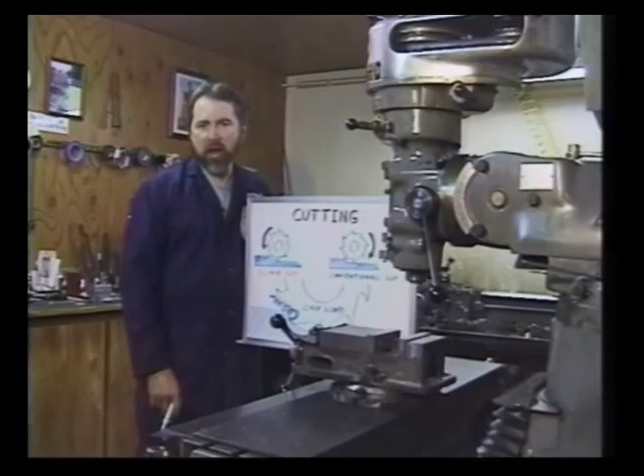It's time to take a look at cutting speeds, feeds, chip loads, etc. Also, we're going to be looking at the different types of milling cuts that we take: climb milling, conventional cutting. You heard me talk about those earlier.

More importantly, the types of feeds and speeds that we are going to show you in the formulas have all been prepared by the automotive industry, Society for Automotive Engineers, for high production capabilities, which will probably far exceed your expectations and what you may be able to achieve on a small vertical type milling machine like the Bridgeports and the Bridgeport knockoffs.

We'll show you the right formulas to determine the correct cutting speeds, feed rates, chip loads, etc. But bear in mind these are averages and examples for maximum production, and I strongly suggest that you back away from those a little bit.

We want to make our machine last. I believe in giving the machine a little bit of TLC while working it pretty hard so it earns its keep. But by no means do we want to wear a machine out in 2 or 3 years because we're trying to max it out every time we turn the switch on.

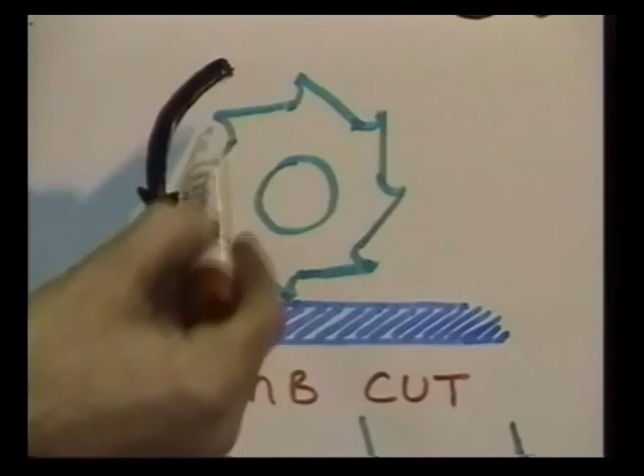Alright, let's take a few minutes and go over the different types of milling cuts and how they're performed. You can see here we're talking about climb milling. The rotation of the cutter is counterclockwise, and we are feeding the material in this direction into the cutter.

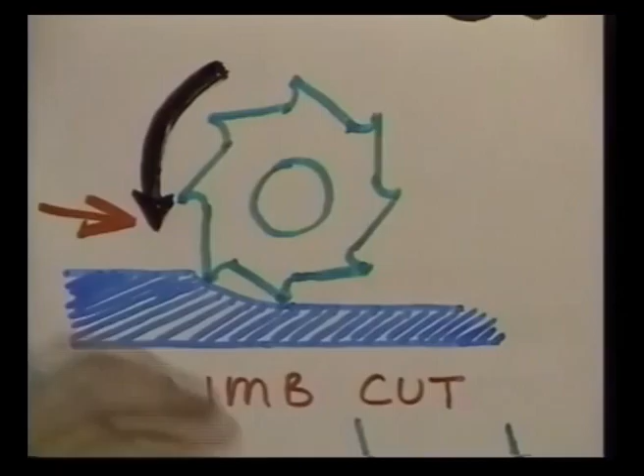So as these cutting teeth come around, in essence they're climbing, walking over the top of the material. This is done more in a horizontal mode. You can do it on the vertical mill as well, and this should be done only for finish cuts.

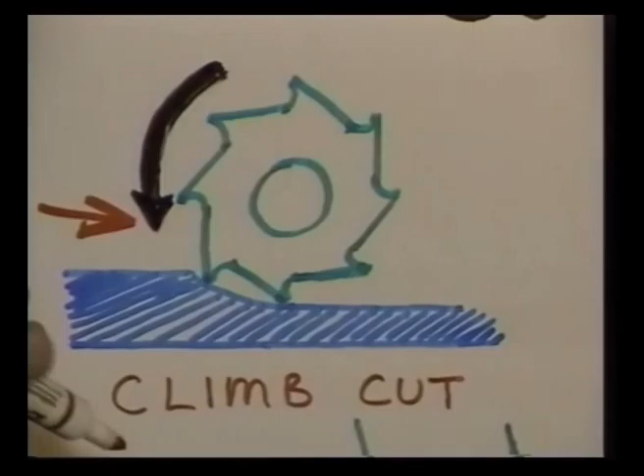If we were to take a real heavy cut in this fashion without having some type of restriction on the table feed, either manual or power feed, this cutter would want to keep advancing and sucking that material into itself, pulling the material from the jaw, from the work hold down on the table.

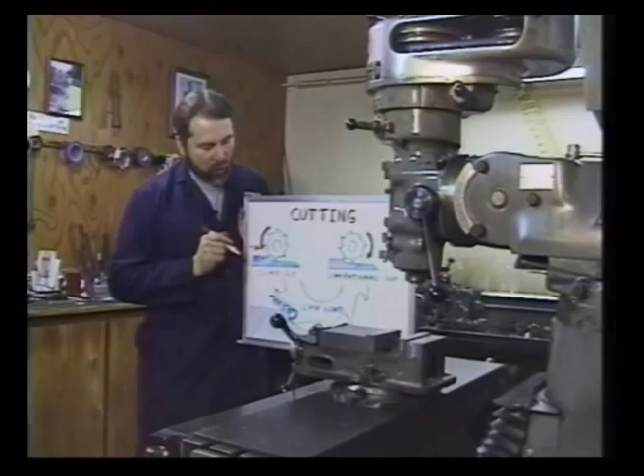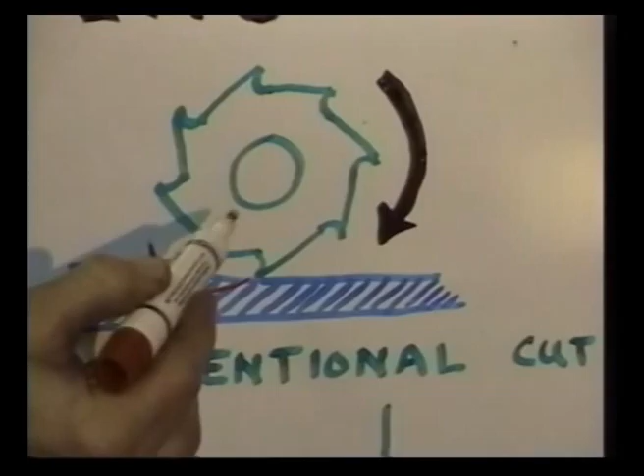A more appropriate cut for most of our roughing cuts is a conventional cut. The cutter is rotating clockwise, and we're digging out as we work around this cutter each and every time, scooping that work material out as we go. The machine itself is resisting the advancement of the cutter.

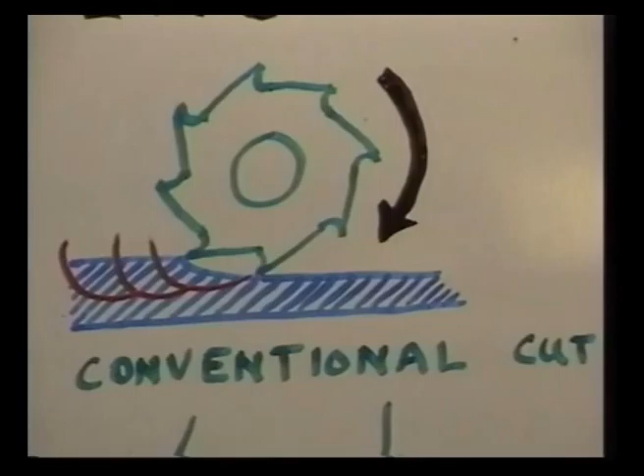We can do a lot of roughing this way, and then we'll come back with a climb cut and take 10 or 15 thousandths, working our way over the top, producing a very smooth, uniform finish on the parts.

Now let's go to the bottom of our diagram and take a look at the chip load. This will give you a better understanding of what's actually occurring. Each flute or tooth on the cutter comes around, scalloping up that work material as it's removing material from the base plate we're milling here.

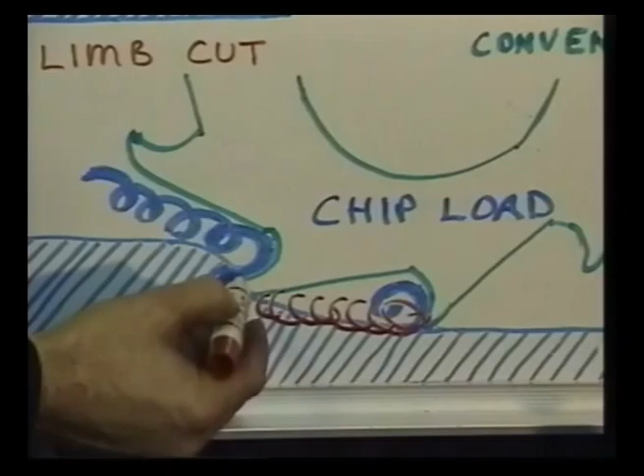We want to maximize the revolutions per minute, the depth of cut, and the feed rate we achieve, to pull off the maximum amount of material without abusing our machine.

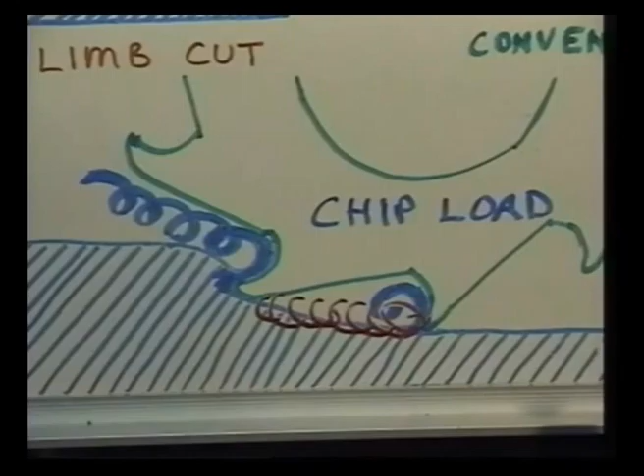As we look at this cutter, can anyone tell me what type of milling we're doing? Is it climb milling or conventional milling? For those of you that said conventional milling, you're catching up to speed. The cutter is coming along, scooping out this material as it works its way along.

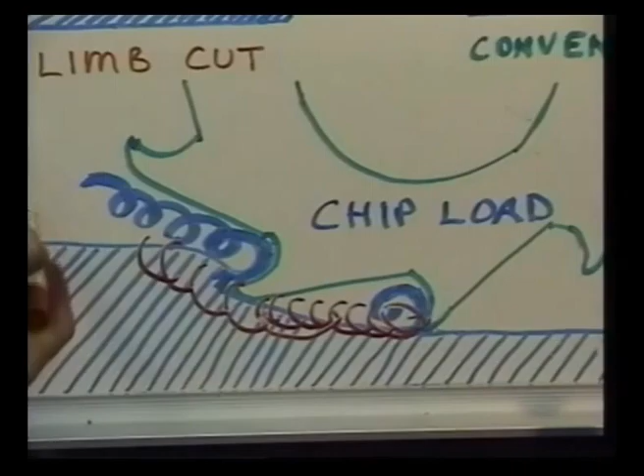If we were climb cutting, the cutter would be going in a counterclockwise position, walking over the top of the part. Alright, we only use that in a finish cut application. That pretty well covers the two types of milling cuts: conventional milling and climb milling.

If we've lost you somewhere along the way, by all means reach over and hit rewind, review this section until you have a good understanding of these types of milling operations. Now let's take a look at spindle speeds.

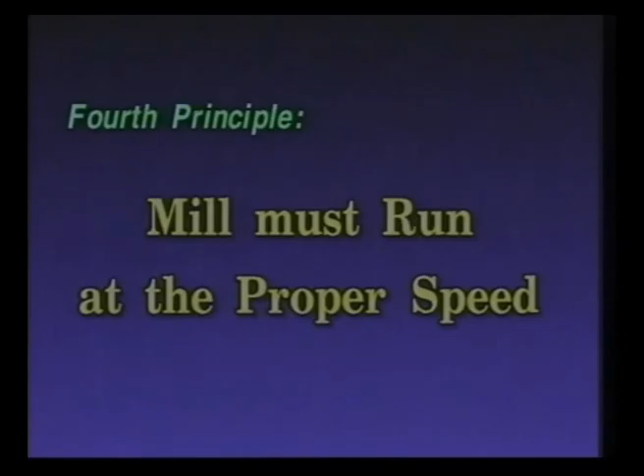For some of you, determining the proper spindle speeds may be a little confusing. It's actually very simple, but in order to determine the correct spindle speeds, we need to understand more about surface feet per minute, which is the amount that cutter rotates in a complete revolution.

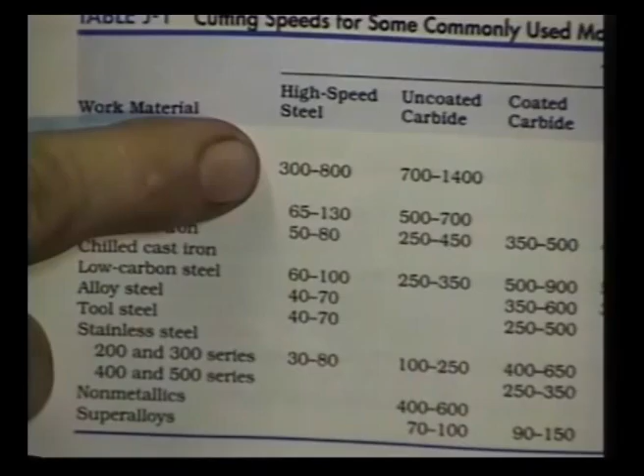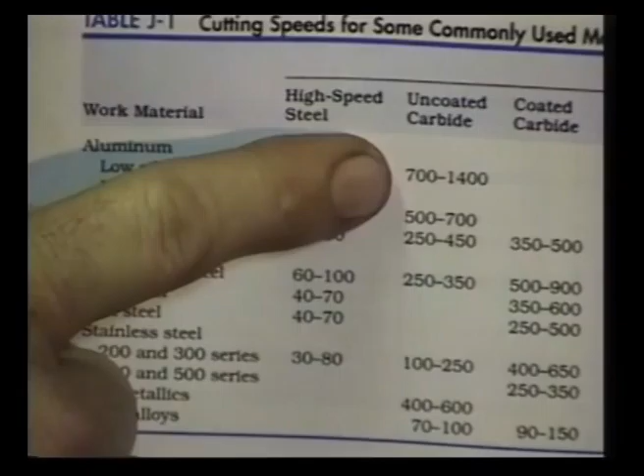Let's take a look at a chart showing some of the different surface feed rates for different types of materials we're likely to encounter in our machining course. Aluminum, using a high-speed steel end mill, would have a surface feet per minute rate of 3 to 800, so we'd choose something in the middle, say 5 to 600. If machining with uncoated carbide, that speed goes up considerably to 7 to 1400. I would choose middle of the road, say 1000.

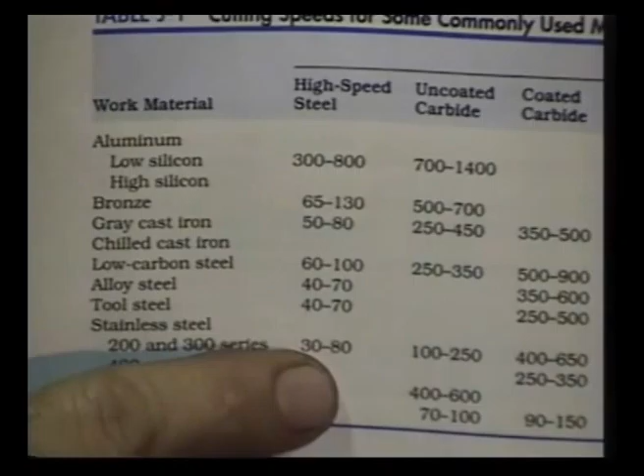Now let's look at some different materials. Low carbon steel with a high speed end mill: 60 to 100. Uncoated carbide: 250 to 350. Stainless steel, 2 and 300 series: we'd be looking at 30 to 80 with a high speed end mill, and 100 to 250 with an uncoated carbide.

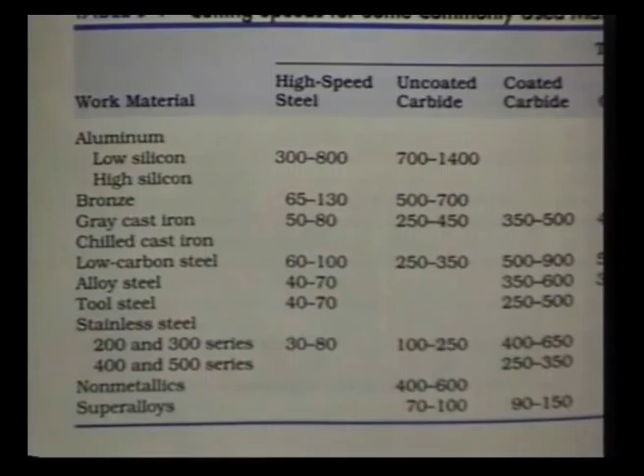These are the different standards we'll use when calculating the correct RPM for the type of material and cutter being used. Remember, when trying to determine the correct RPM of our cutter, these numbers are in surface feet per minute. It's very important to remember this when we calculate RPMs. Copies of this chart and others are available in your Machinery's Handbook. Remember, these are averages we want to use to determine the correct cutting speed. Variables will include types of material and heat treat of those specific materials.

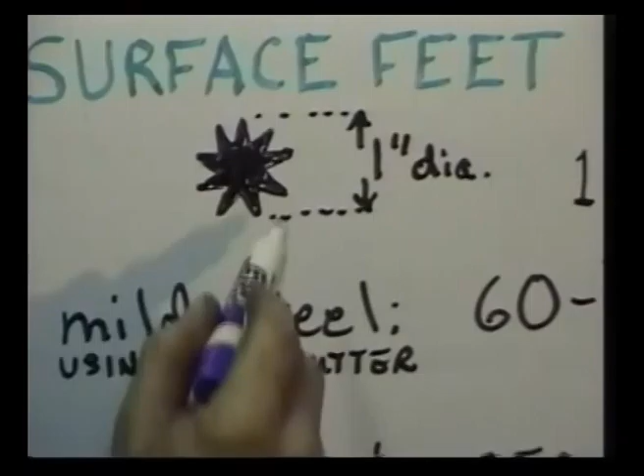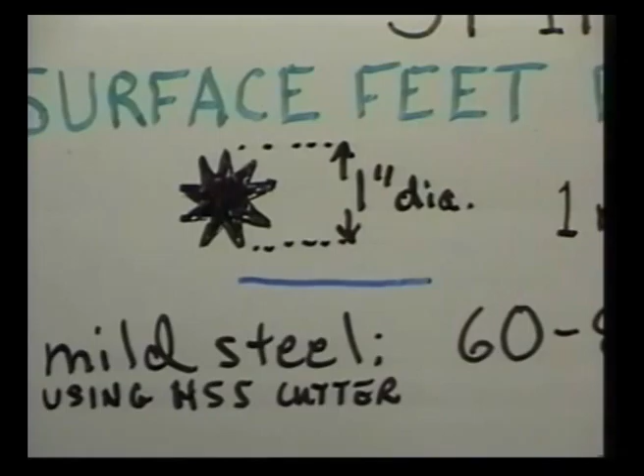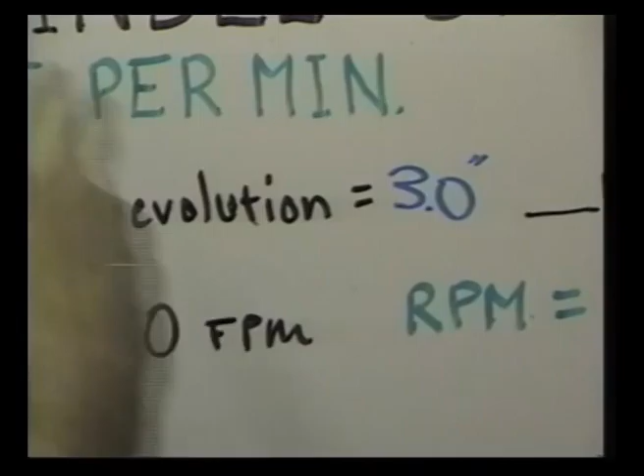Now let's look at some practical applications and determine the proper spindle speeds for different materials. We have a 1-inch diameter cutter, and if we visualize unraveling that cutter at a starting point and rotating it one complete revolution, or multiplying it by pi, that cutter in surface feet is going to lay out 3 inches. So one revolution of the cutter is equivalent to 3 inches if we were to unroll it based on its diameter.

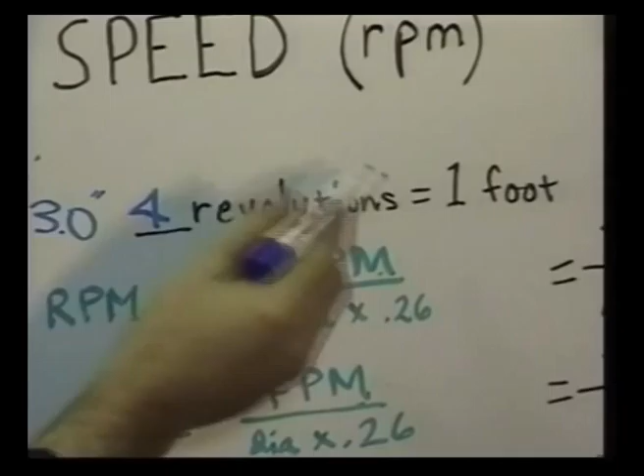Now, the number of revolutions to make a foot: we would have 4 revolutions equals 1 foot. It's important to understand that this figure isn't one we're going to work with directly. It helps us understand that 4 revolutions equals 1 surface foot of rotation of a 1-inch diameter cutter.

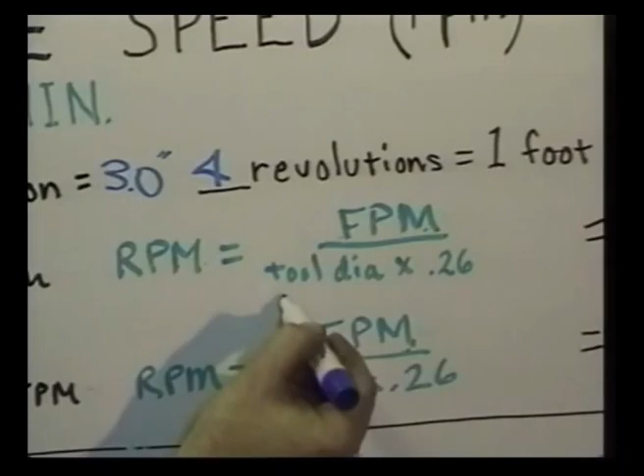Now let's take a look at the formula: RPM equals feet per minute divided by the tool diameter times 0.26. This is the basic formula we're going to be working with. Now let's apply that formula.

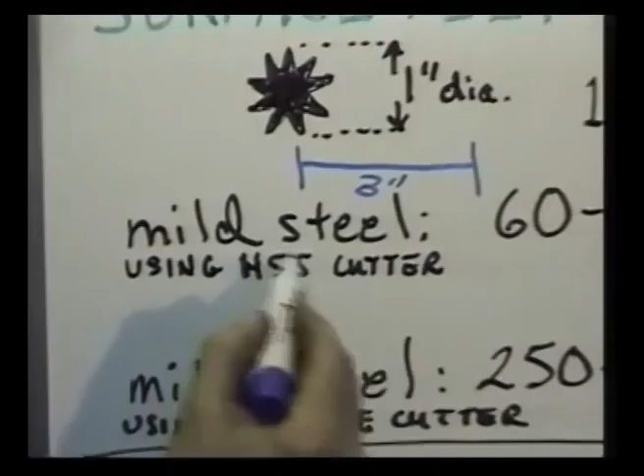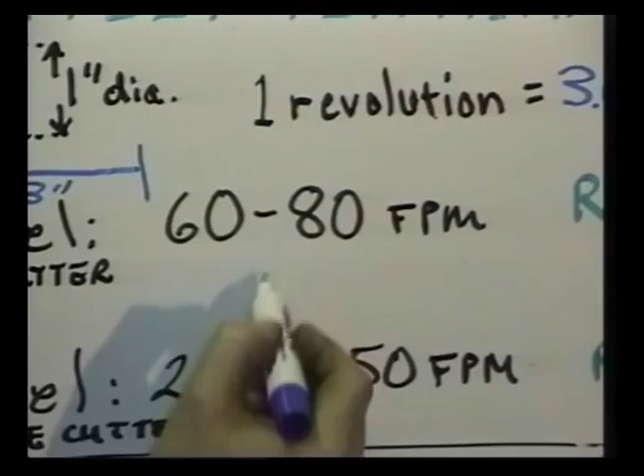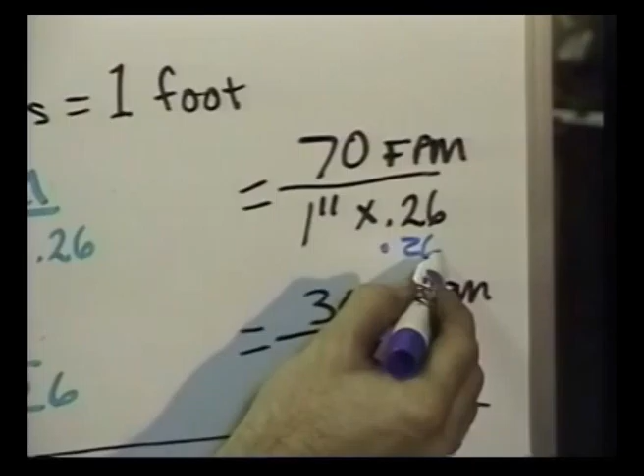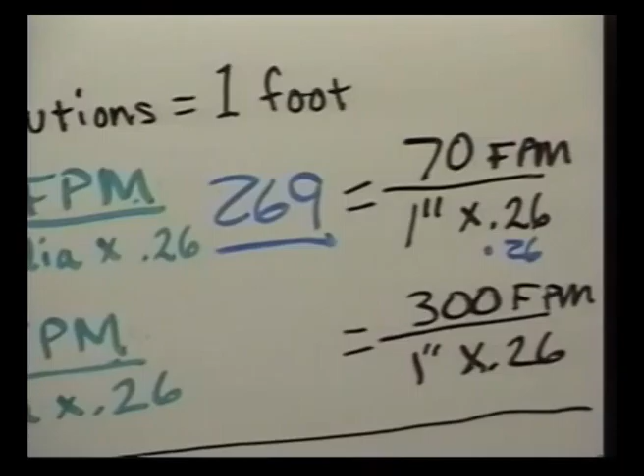We're going to be machining mild steel using a high-speed cutter. The cutting speed is 60 to 80 surface feet per minute, so let's average that out and use 70 as our factor. We've got 70 feet per minute using a 1-inch diameter cutter times 0.26. Multiplying those gives us 0.26. We divide 0.26 into 70, and that gives us 269, which is the RPM we'll use for a 1-inch cutter machining mild steel.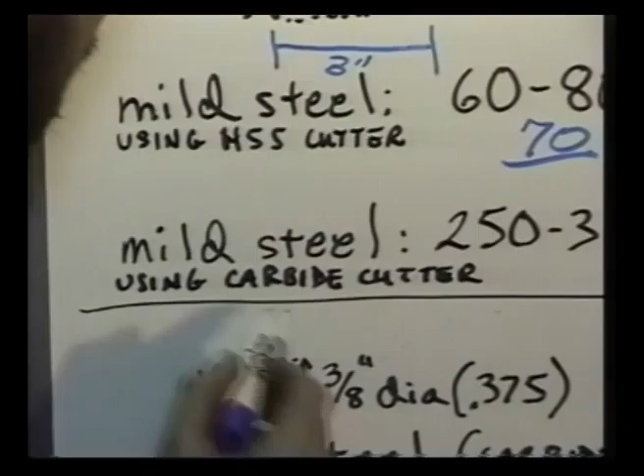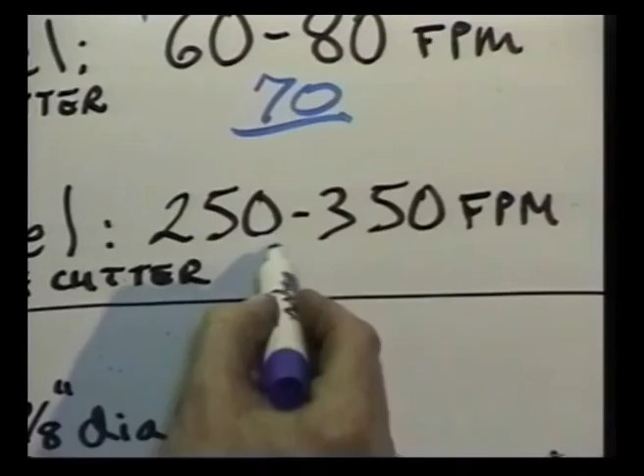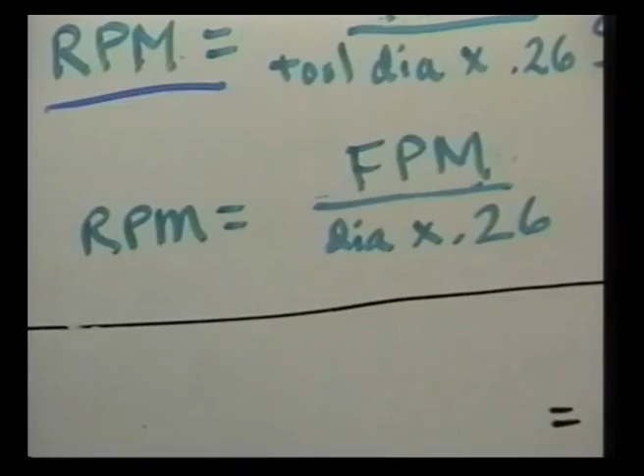Now let's use another example: machining mild steel with a carbide cutter. If we refer to our chart, the suggested surface feet per minute is 250 to 350, so let's average that at 300 feet per minute. To determine our RPM, we have 300 feet per minute, using the same 1-inch diameter cutter times 0.26, and we divide that into 300. That equals 1,153.

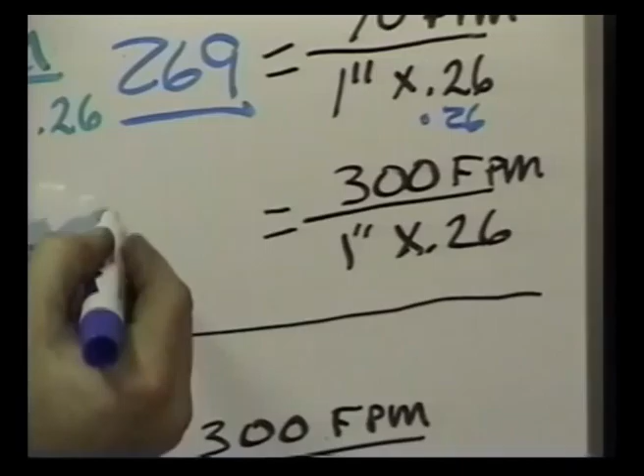So we would simply look on our milling machine and try to find the proper speed as close to that as possible. If we have a speed selection of 1,100 RPM, that's more than adequate for the task at hand. If we have one at 1,200 or 1,250, that should also be pretty decent depending on the type of alloy or material we're machining. Remember, this is a guide—practical application and listening to the machine are also to be taken into consideration when determining the correct RPM.

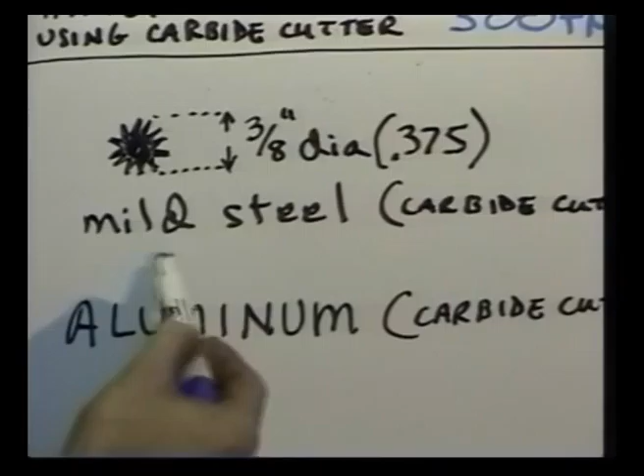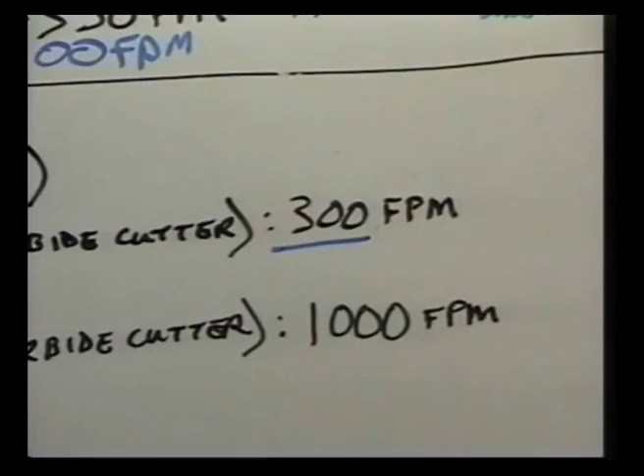Now let's take it a step further with a different diameter cutter: a 3/8 diameter cutter, decimal equivalent 0.375. We're going to machine that same mild steel using a carbide cutter. Referring to our chart again, we average the feet per minute at 300. So we have 300 feet per minute divided by 0.375 times 0.26. 0.375 times 0.26 equals 0.097, so we divide 0.097 into 300.

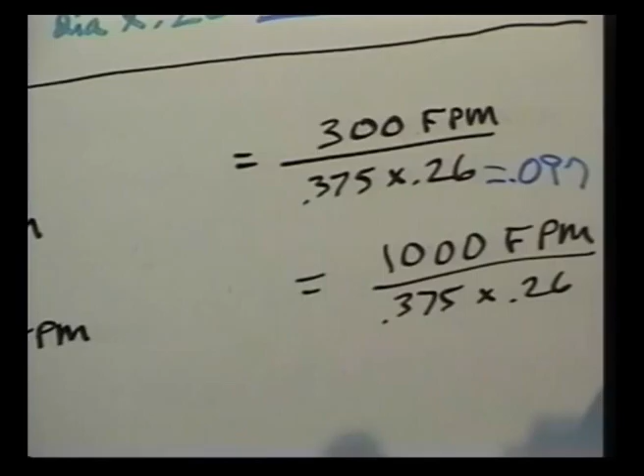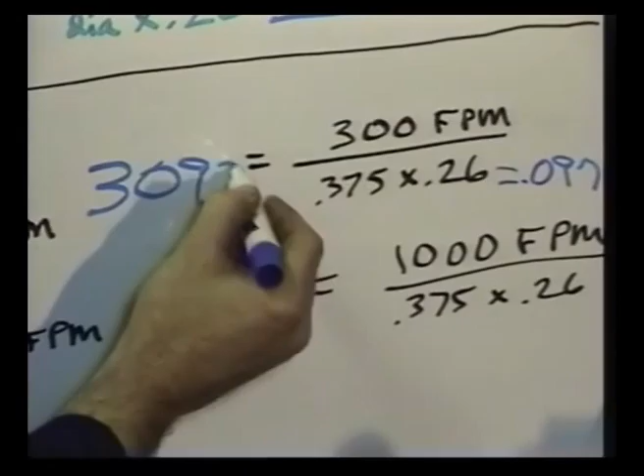And that gives us an RPM rate of 3,092. So again, we would look up on the mill whether we're using a variable speed machine or a step pulley system. It's important to note that a variable speed machine usually has a higher RPM rate than a step pulley system. Does that mean the step pulley system won't work for us? By no means. They've been using step pulley systems long before anybody dreamed up the idea of a variable speed motor. So we would simply choose an RPM rate close to our 3,092 as suggested by our formula.

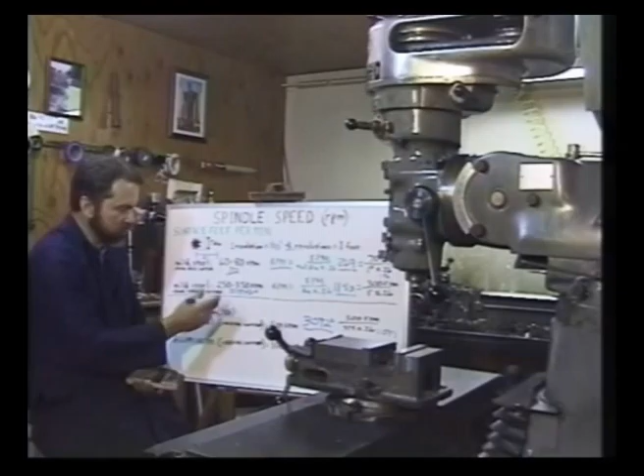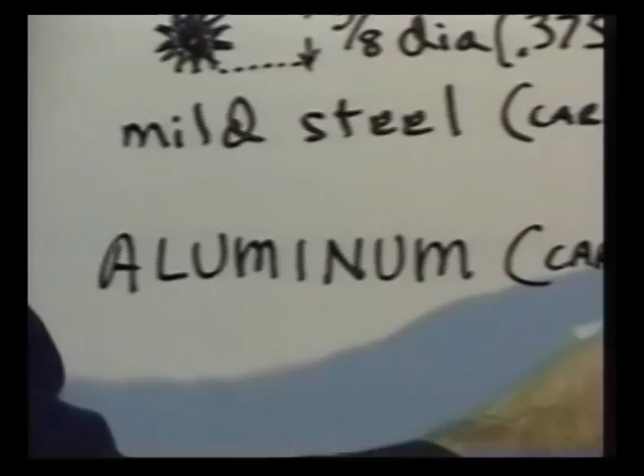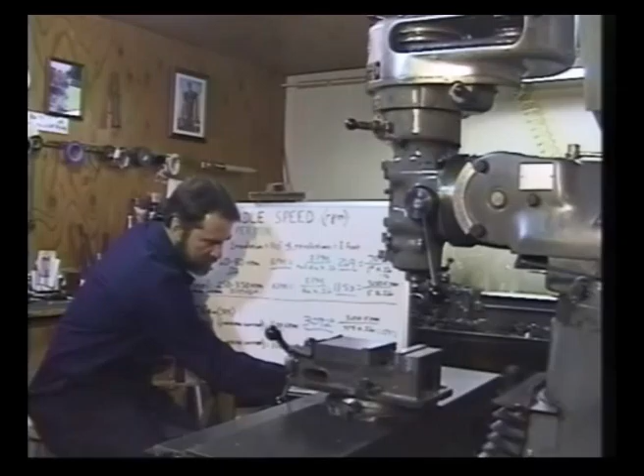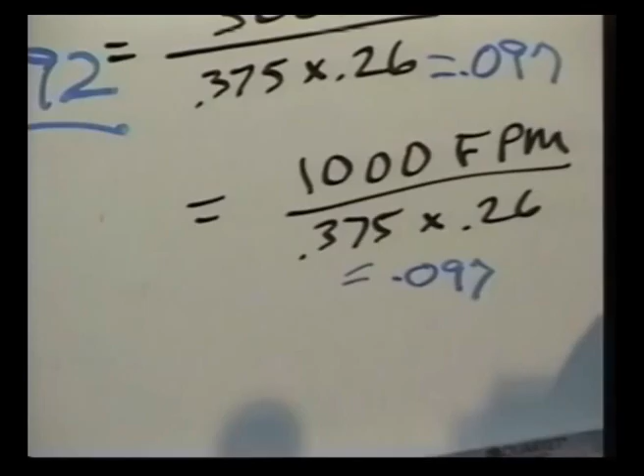Now, if RPM really turns your crank, let's look at what RPMs are required if we're machining a piece of aluminum, again using a carbide cutter 3/8 of an inch in diameter. Consulting our chart shows that for aluminum, 1,000 feet per minute is the proper cutting speed. So we multiply 0.375 by 0.26, and we know from our example above that yields a factor of 0.097. Divide that into 1,000, and we have a whopping 10,309 RPM.

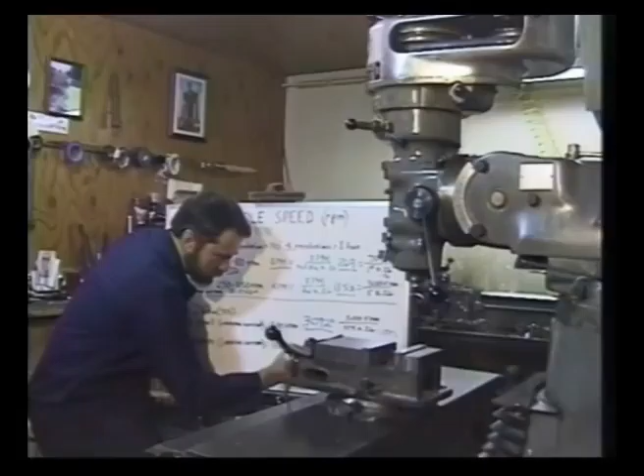Now, before you jump out of your chair and complain that your machine, variable speed or step pulley, is not capable of turning 10,309 RPMs, let's keep in mind these are simply guidelines based on America's highest production rate. The automotive industry is a good example, where maximum production and huge machines are on the assembly line. We're dealing with a Bridgeport style machine or a knockoff weighing 12 to 1,500 pounds, whereas industrial machines may weigh 3 or 4 times that, possessing a 30 or 40 horsepower motor versus your 1 to 2 horsepower motor on your smaller mill.

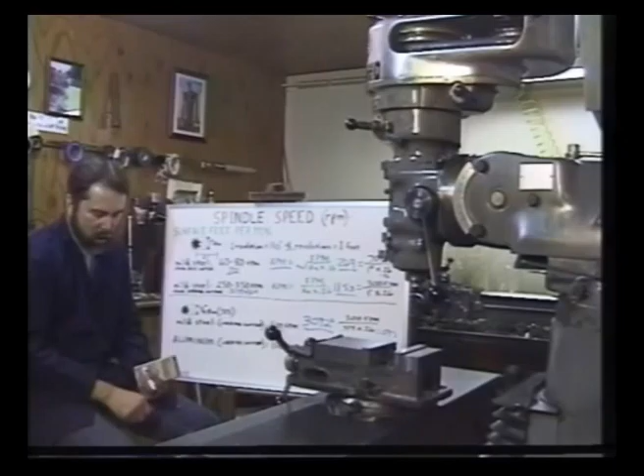It's also important to note that we don't necessarily have to turn at these speeds, that we can turn at a slower RPM with a slower feed rate and still achieve excellent results. You don't have to have the 20 or 30 horsepower machine in order to produce parts, have a good job, or good business in industry. These are just examples based upon figures for maximum production.

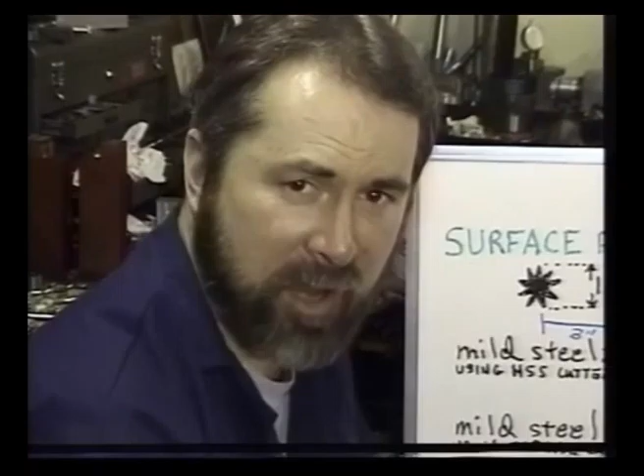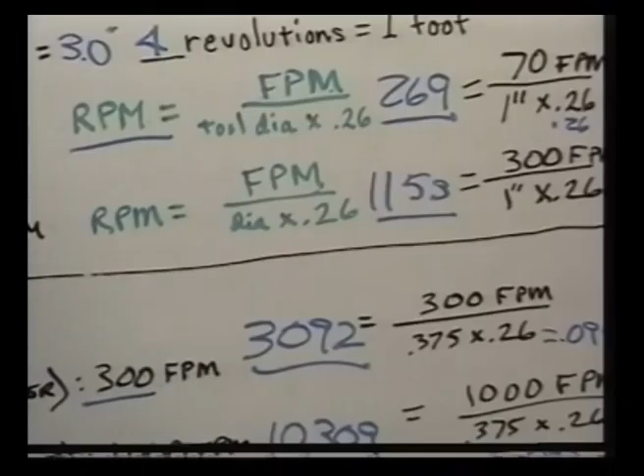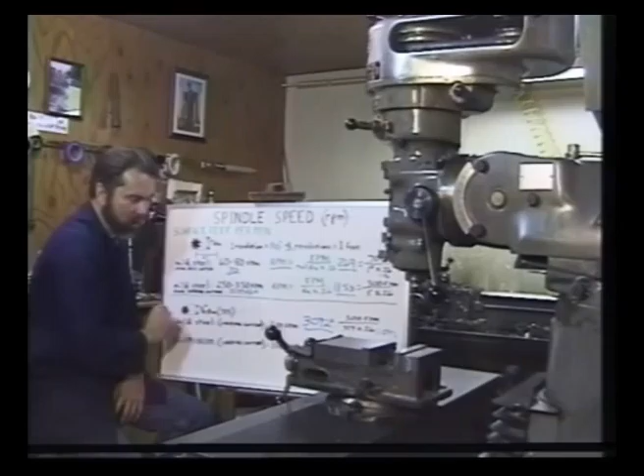We've shown you these examples so you can grasp the relationship between cutter diameter, material, and RPM. It's very important that we understand this whole concept. We talked about different diameter cutters, the different materials we're machining, and how they relate to RPMs. If we deal with a 1-inch cutter using mild steel, our RPM rate is 269 revolutions per minute. If we step down to aluminum with a smaller cutter, that RPM range goes up considerably.

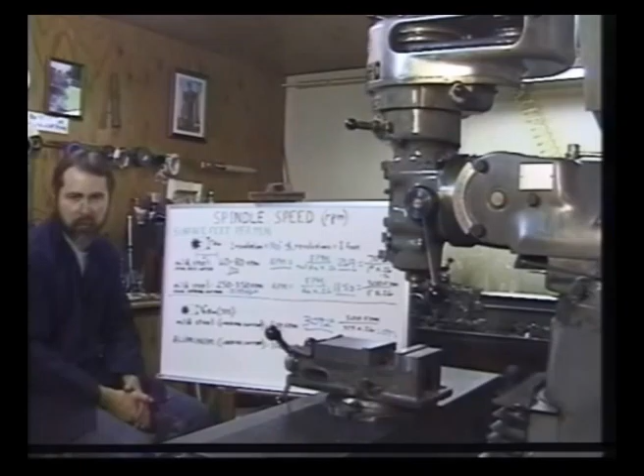So again, we're trying to get you to grasp this relationship: smaller diameter cutters turn faster, and the different materials we're dealing with have a different feet per minute rate. All of these things come together, allowing us to determine the approximate speed we want to turn that cutter for maximum performance. It's important that we understand these relationships. We've shown you different examples. If something is unclear, by all means review it until it's firm in your head, so we can show these under practical application as we move forward.

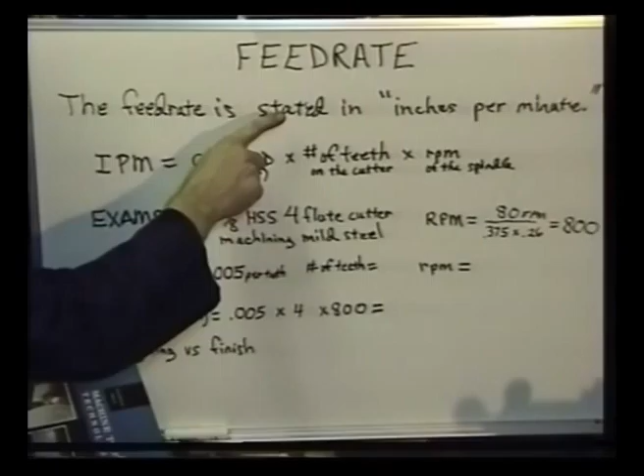Now let's take a look at a couple of other factors we'll need to deal with. We've shown you how to properly determine the RPM rate for a given cutter diameter. Now, the next important thing we need to discuss is the proper feed rate, which is the amount of material we can remove with that cutter at that given RPM. Feed rate is stated in inches per minute. This is the amount of material that the cutter is going to advance through, or the amount of material we push towards the cutter in one minute's time.

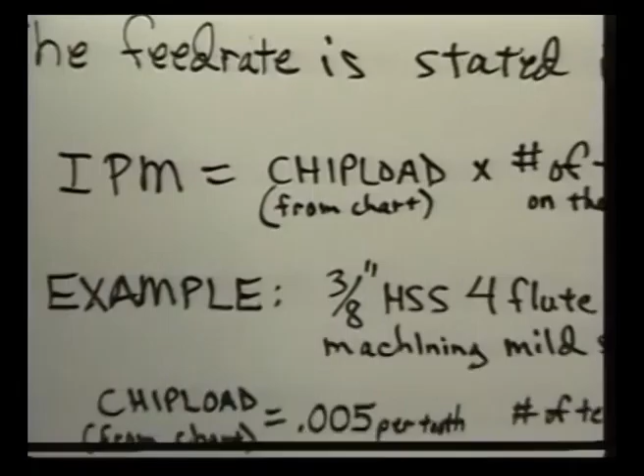Inches per minute equals the chip load times the number of teeth on the cutter, 2 flute or 4 flute, times the RPM. Remember, we showed you how to calculate the RPM, so you've got that in the basket now. Let's take a look at our chart and determine the proper chip load, and then we'll go back to the board and show you some examples on how to properly figure the feed rate.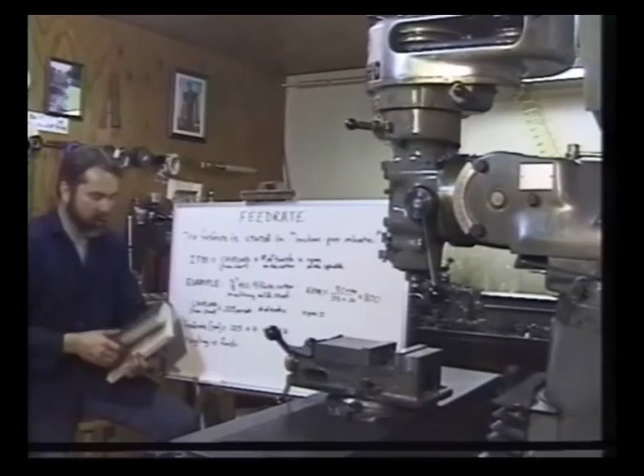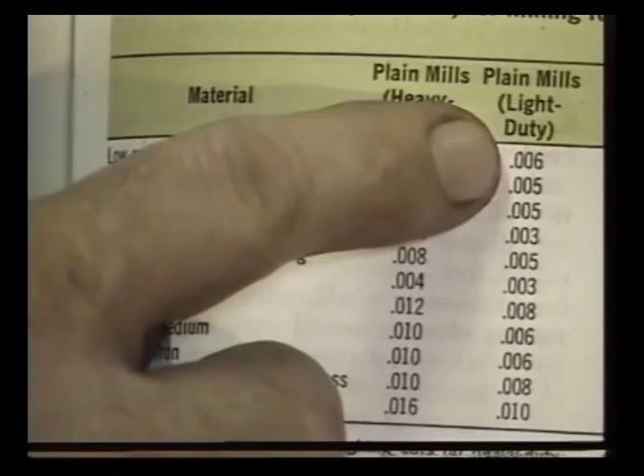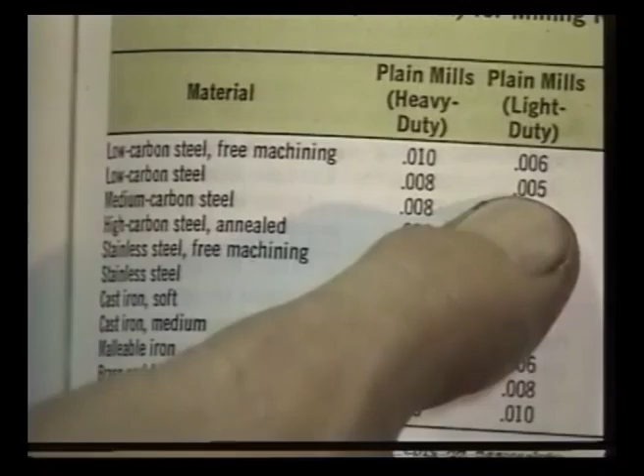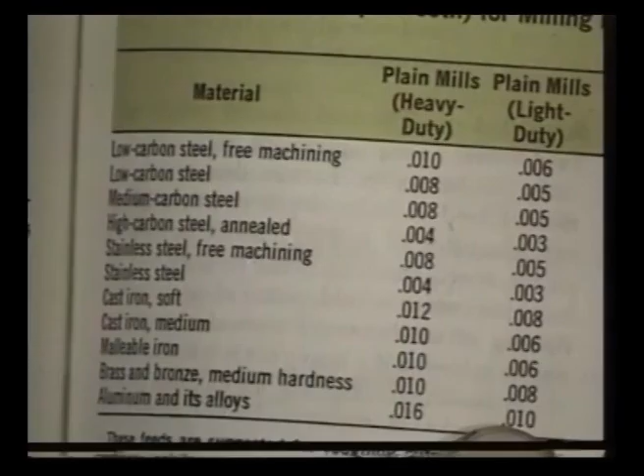We're going to be machining low carbon or mild steel. We have a section for plain heavy-duty mills and plain mills that are light duty. In my opinion, the Bridgeport type mill falls under the light mill application. If we look closely, we have a chip load of 5 thousandths per tooth. Now let's take a look at aluminum and see how it applies to steel. Aluminum and its alloys on a light duty machine have double the chip load at 10 thousandths. So you can see aluminum, when we really want to push it to the max, we can machine twice as much as we can in steel.

Keep in mind, these are for roughing cuts with high-speed steel, and again, these are just averages that we want to determine. In these particular applications, when we start machining, we're going to listen to the machine and watch the cutter to see how it is performing in the milling operation.

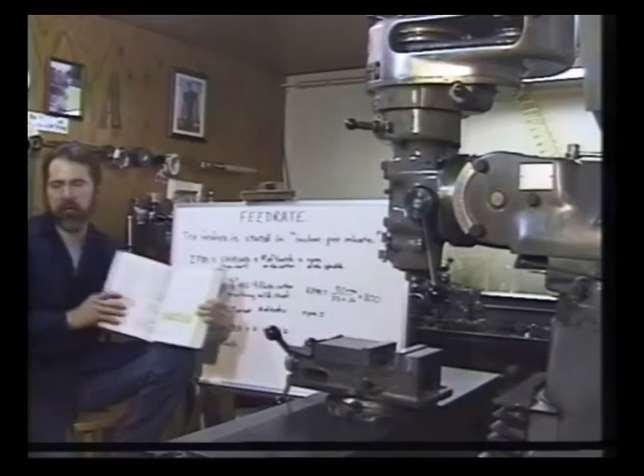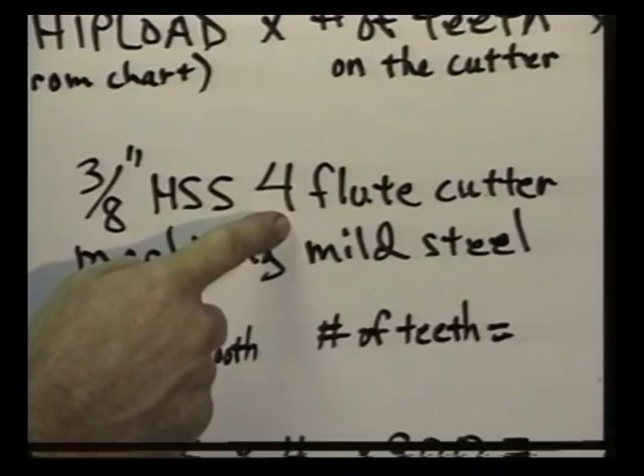So with that knowledge at hand, let's take a look at our example. We're going to be using a 3/8 diameter high-speed steel cutter that has 4 flutes. The material we'll be machining is mild steel. In order to determine our RPM, which is part of the equation, we'll refer back to our chart for mild steel. We've got 80 feet per minute. We're using a 3/8 diameter cutter times 0.26, which yields 800 RPM.

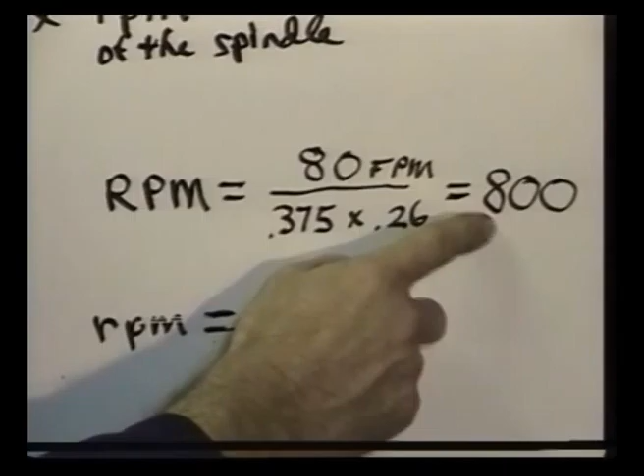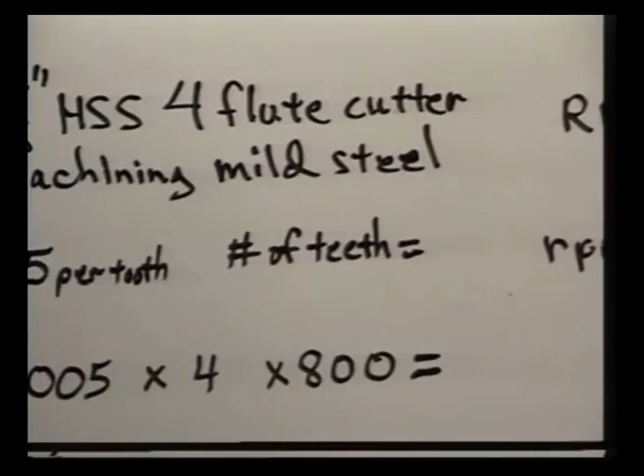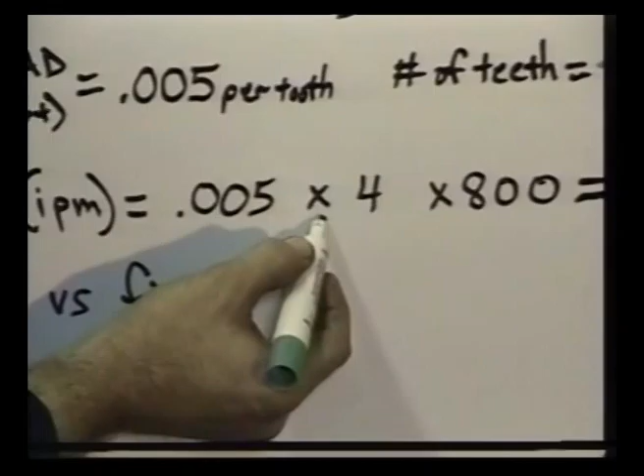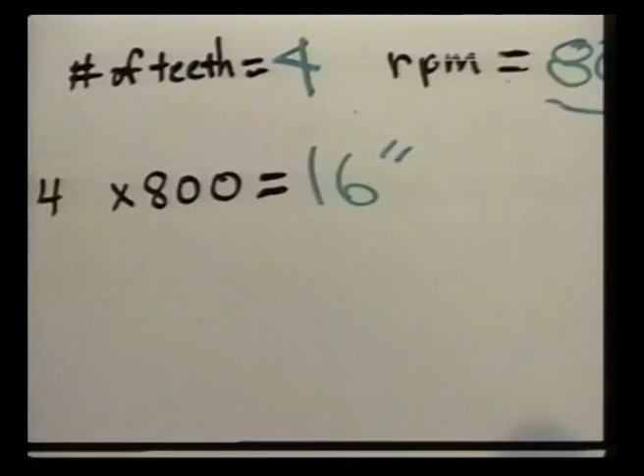Our chip load from our chart, remember, was 5 thousandths per tooth. The number of teeth in our cutter, since we're using a 4-flute cutter, is 4. Our RPM is 800. So our feed rate in inches per minute equals 0.005, or 5 thousandths, times the number of flutes or cutting edges, which is 4, times 800. If we multiply those out, we end up with 16 inches per minute as a feed rate.

Many of you are going to be going, wow, that is a lot of material to remove. And you're right. Remember, these are averages for roughing material and maxing out the cutter. I would not suggest from the get-go trying to establish 16 inches per minute as a feed rate with that cutter. I would suggest reducing that by approximately 50%. Get a feel for what the machine is doing, get a feel for how the cutter performs, the type of coolant, and again, the material that we are machining.

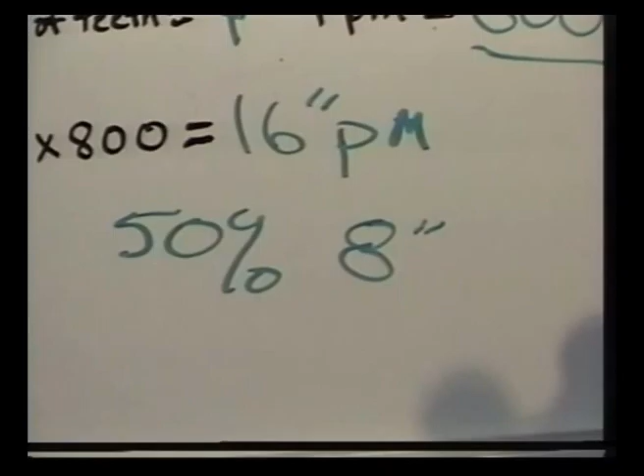If it machines just fine at a 50% reduction, or at 8 inches, that's fine. We can push it a little bit harder on the next part that we're machining. It's very important that we don't overstress our machine. A Bridgeport will last you a long time. I've been working with mine for over 20 years now, and the machine is still in excellent condition. The only thing we're sacrificing by babying the machine is how quickly we're able to spit the parts out.

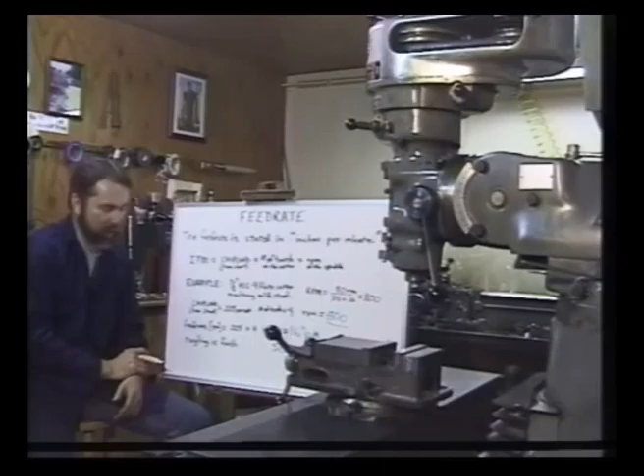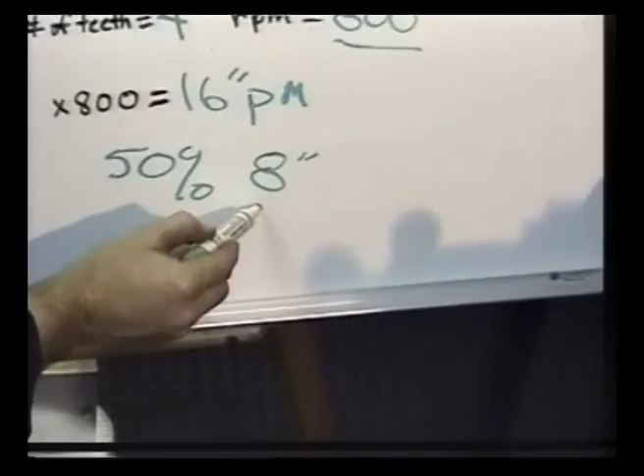When we're working with feed rate and our hand wheels, remember that each revolution of the hand wheel is 200 thousandths. So if we have a feed rate established at 8 inches per minute, how many revolutions of the hand wheel do we need in that 1 minute's time? 200 thousandths per revolution times 5 gives us 1 inch. We've got 40 revolutions per minute. So you can see we're clipping along at a pretty good rate, even at 8 inches per minute, in order to feed that cutter through our given material.

And that's what we want to establish, a smooth, even rotation of the hand wheel as we advance the cutter into the workpiece. When we start machining aluminum and steel, we'll give you different examples, and you can see and listen to the machine in order to determine that ideal feed rate based on cutter diameter, type of material, and the specific chip load for the material being machined.